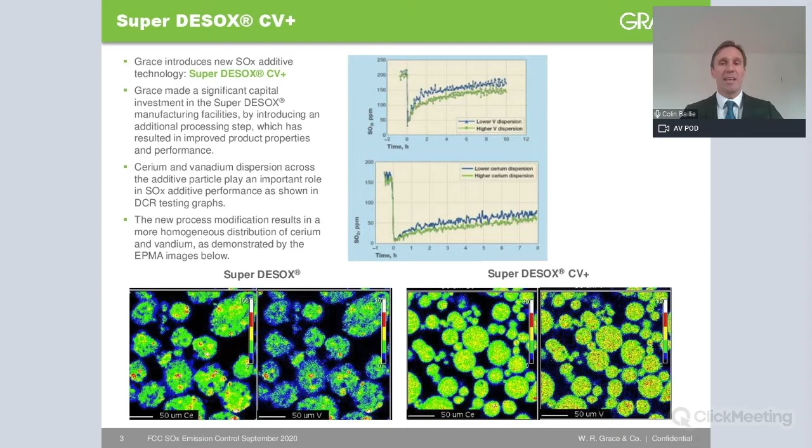Slide 5 shows the XRD pattern for Super DESOX in red versus the improved CV+ in blue. The magnesium alumina spinel peak is at about 45 degrees, with free magnesium oxide appearing as a shoulder on the left, and there is a second peak associated with magnesium oxide at around 60 degrees.

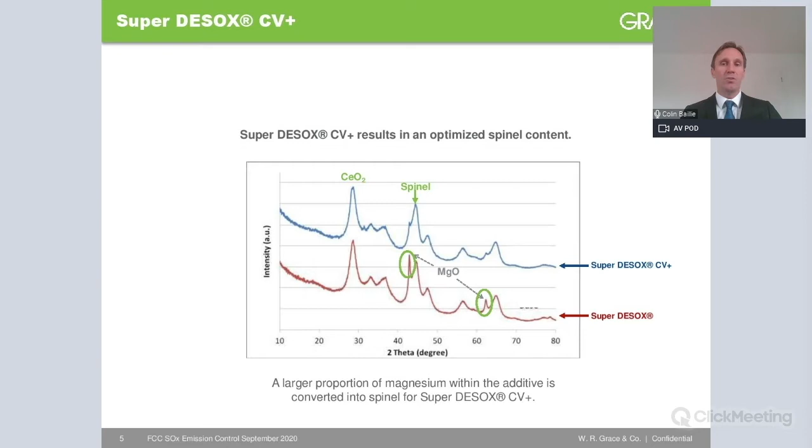In addition to these trials shown in the table, we also have a couple of additional Super DESOX CV+ trials lined up in 2020, which are expected to start in the fourth quarter. And as well, the additional processing step that we introduced to the manufacturing facilities has allowed us to pursue some additional new technology leads. And through ongoing R&D projects, we are hopeful that we can launch the next technology advancement in 2021.

So moving into the second half of the presentation, I will give a brief discussion of some of the recent case studies that I have been referring to. So one of the initial trials that took place was at Refinery A in North America, and this began in March 2019. This is a case study that the refinery gave us permission to publish, which we did in the fourth quarter edition of Petroleum Technology Quarterly. It's an FCC unit that operates in full burn, and the refinery initially switched from the non-Grace SOx additive to the CV+ at a 1-to-1 replacement rate.

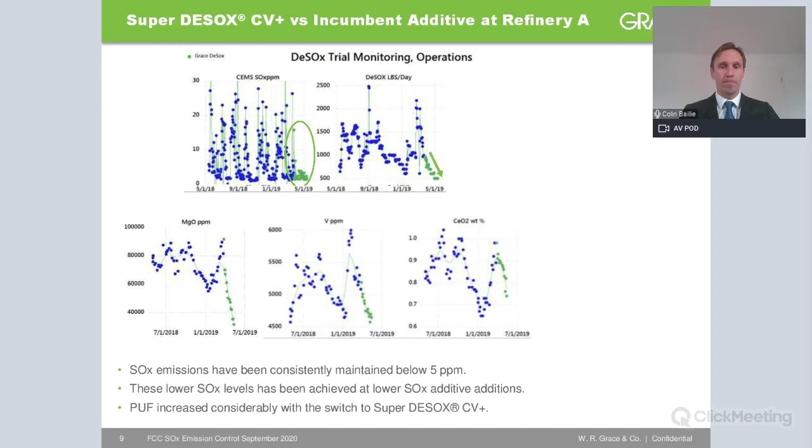But really the conclusion here is that whichever way you look at it, at comparable conditions, the Super DESOX CV Plus is delivering lower SOx emissions than the previous additive technology. The refinery subsequently decided to use CV Plus on an ongoing basis, and they continue to see excellent results.

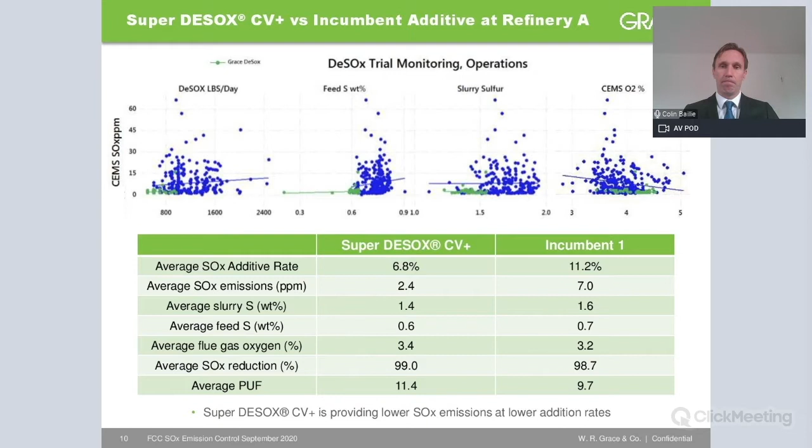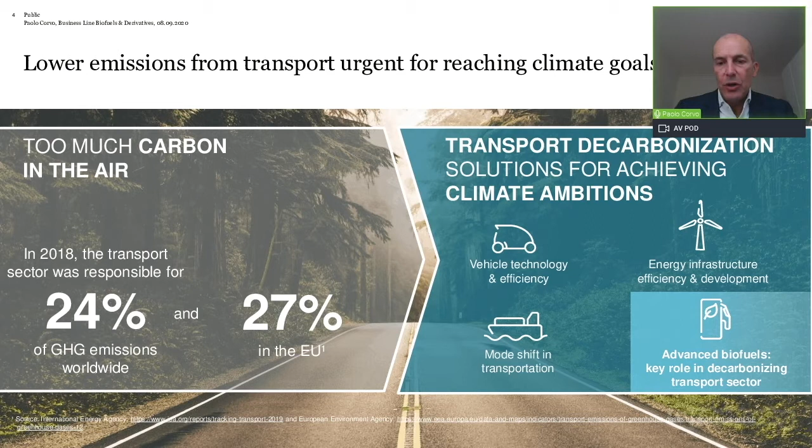You can see here on the right that solutions that are enabling to achieve and decarbonize climate are certainly ambitious targets to be achieved. We believe that in addition to vehicle technology and efficiency, energy infrastructure efficiency and development, and also different modes, and so shifting transportation modes, advanced biofuels, and more specifically lignocellulosic ethanol, is certainly the solution that plays the most important role in decarbonizing the transportation sector.

India has set a national biofuel policy back in 2018 with specific requirements to build up 12 second-generation ethanol plants by 2022, and public tenders are ongoing as we speak. Then we have the Americas, North America, and more specifically, certainly with California as one of the key areas or as a benchmark when it comes to acceptability and interest in advanced biofuels.

South America with the renewed RenovaBio legislation that came into force in 2020, which is requiring to double the volumes of ethanol in the country. And then finally, we have Europe, which is by far one of the benchmarks when it comes to renewable energy requirements and advanced biofuels. How does it look when it comes to Europe?

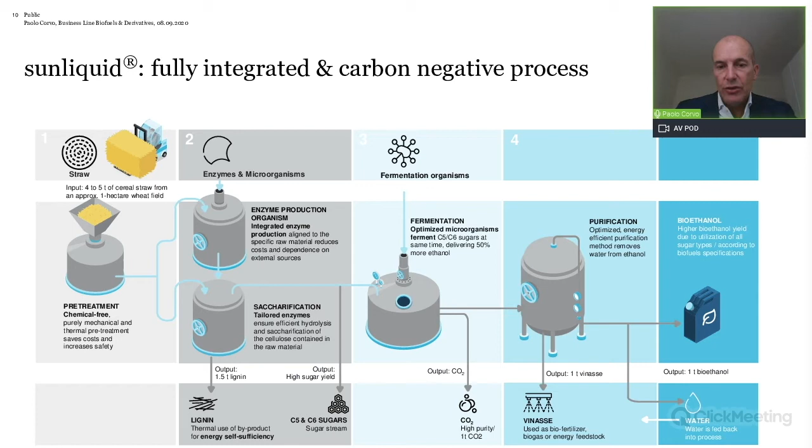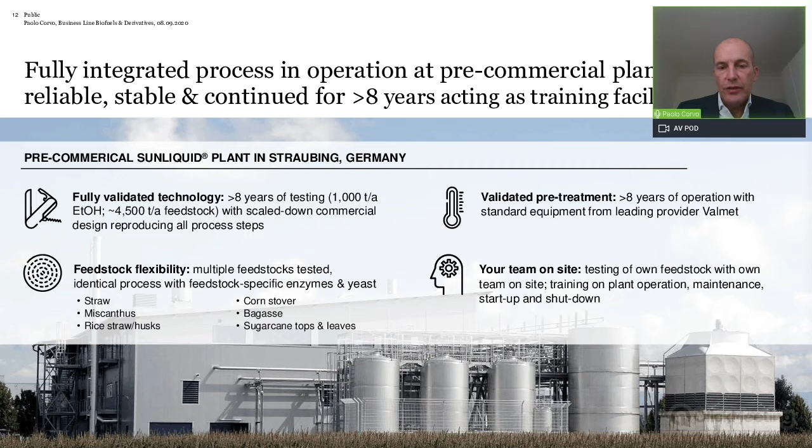So we validated the process, we validated the results on the conversion of the feedstocks to sugar to ethanol. And this really has been serving as a testing site and also as a training site for our customers. So the customers bring their own feedstock here. We test it. We provide back the results and also the samples. And this is the base for us to then start our license and service contract based on the results obtained in the facility.

The natural next step was to go from this pre-commercial site to a commercial site. So this is what Clariant has decided to do, to invest its own money in a plant that we are constructing in Romania. This will be a 50,000 tons ethanol facility using locally sourced feedstock. This will create a substantial number of jobs, will be our first of its kind plant, and will be used as a training facility also for our customers.

The pathway to where we're at now: the decision and approval was back in 2017. We broke ground in 2018. We started harvesting the amount of feedstock necessary on the field. This is an area, Podari, Romania, where the straw is left on the field, so we had to construct the whole value chain. This is a good learning activity for us to be deployed and brought to the market to others, to our customers. As we speak, we are into construction, and we are expecting to complete the construction by 2021 and from there onwards start the production.

I told you that we had to create and complete the value chain, and that's what we're doing with a dedicated team. And this asset that is internal to Clariant is brought back on the market so we can supply our prospects with knowledge and support them in the creation of the value chain. Now I would want to show you a latest drone video that was taken some days ago in Romania so that you can appreciate the construction progress at the site.

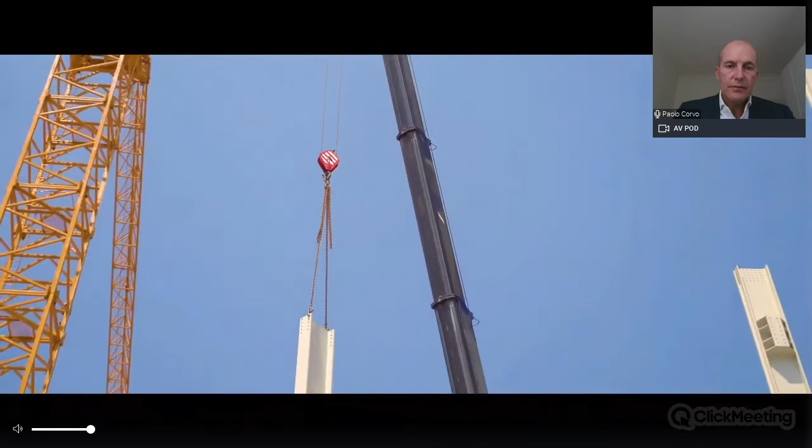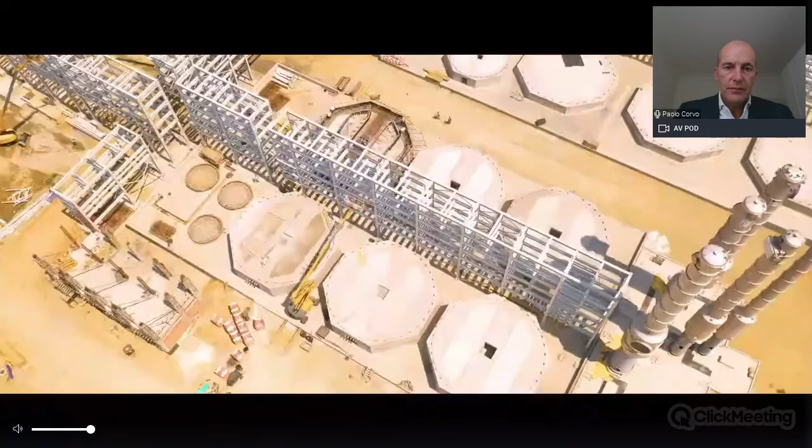Good. So we're quite proud to be able to show this drone video, because despite the terrible times of Corona throughout these months, we were able to continue the construction of the site, of course, with all the required safety measures, both for our employees, but also for the construction site workers.

So our responsibility is not only to construct this site and showcase this facility as a training facility for our customers, but it's also to bring the technology to the market by licensing, so by selling licenses. And this is what we've done. We already sold these 3 licenses in Europe to different players. The first one was sold to Enviral, a first-generation ethanol and biodiesel player. It's a 50,000 tons ethanol facility in Slovakia.

The second one in Poland to a mineral oil player. It's a 25,000 tons per annum site with straw, locally sourced feedstock. And the last one that was sold in Europe is to Etabio, a Bulgarian company, which is one of the major players in the Bulgarian agricultural sector. So I think it is important to state that sunliquid technology has been sold to different players throughout the whole value chain, from feedstock to first-generation ethanol players to mineral oil players.

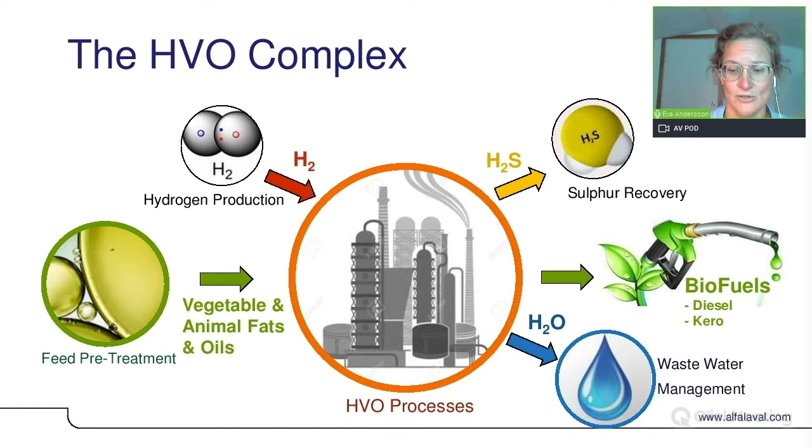If we start with the feed pretreatment, the feedstock flexibility, that is going to be the key parameter to make your plant as profitable as possible. Selecting the right feedstock, depending on what product you want to produce, depending on what kind of availability there is in the market, and depending on what kind of plant you are going to run it in, is going to be key. There are different kinds of feedstocks. And of course, seed oil is one of the most commonly used feedstocks.

And among the seed oils, crude palm oil is by far the most popular feedstock for HVO production. One reason is because it has a very low phosphate content. So it has little impurities and requires only very little pretreatment. It also has a high availability in the market, and it has a high energy intensity. So you will get a high yield of products if you are feeding your HVO unit with crude palm oil. But of course, for obvious reasons, there are other concerns with crude palm oil as a feedstock. There are environmental concerns, and there are also policies that might even block you from using crude palm oil as a feedstock to your plant.

It means you might start to look at other kinds of seed oils, such as rapeseed, corn, sunflower seed, which are all available in the market, but they have a higher phosphate content. And with a higher phosphate content, it means you're going to need more pretreatment steps in order to remove impurities that could otherwise poison your catalyst or create fouling in your process equipment. There is also, with other seed oils, the food versus fuel debate. So the seed oils that are also competing as food might become less and less available, and they won't be available to be used for fuel production.

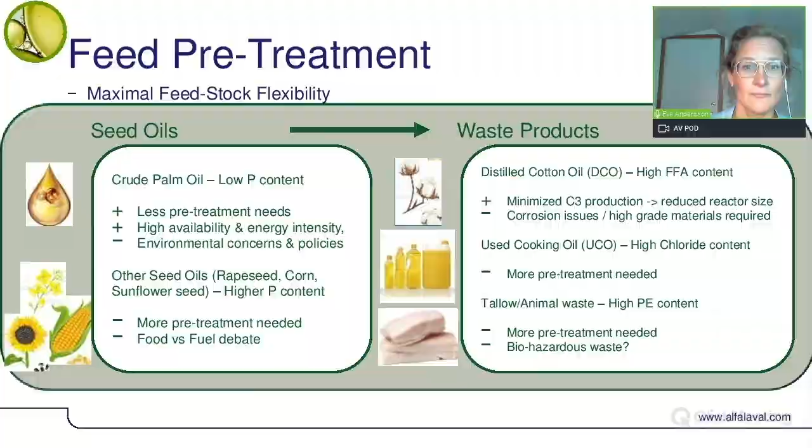So if we are looking at the different feed pretreatment steps required, as we said, with crude palm oil with very low phosphate content, you actually only need one pretreatment step, and that's an adsorption, where clay is being used to precipitate and take care of the phosphate compounds.

You will get a byproduct, which is spent clay, which contains residual oils, soaps, and metals. But after that, you have a pre-treated feedstock ready to go to your HVO.

For all other seed oils where you have a higher phosphate content, you also need to have a degumming section. Degumming can be of various kinds. It can be just hydration, washing with water, or it can be chemical, which means you are treating it with a weak acid, or it can be enzymatic degumming, where you need an enzyme to remove the phosphate compounds from the feedstock. The byproduct from degumming is wastewater containing all these phosphorus compounds that you have removed. And that wastewater needs, of course, to be treated.

If we jump down to the lower section, you have your used cooking oil. The used cooking oil contains a lot of chlorides, which need to be removed before you send it to the degumming section. That's again a water washing, which then creates a wastewater containing chlorides. Then you can continue with the degumming.

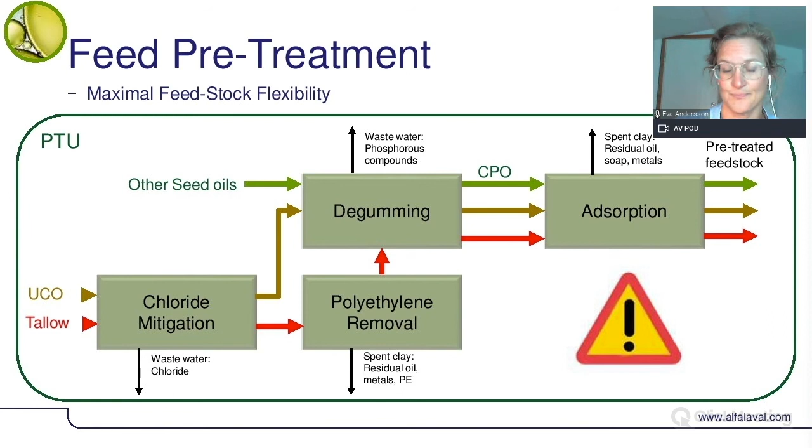All of these processes are operating at quite low pressures and temperatures if you compare to normal refinery processes. So in that sense, you could say that they are more safe, there is less risk operating them. But there are, of course, other safety and health issues that you need to be aware of. One of the most important is the self-ignition of a lot of the feedstock being used for the HVO pre-treatment. So you need to be very careful with oil spills to make sure that you don't get a dangerous situation in your pre-treatment unit. And as I mentioned before, if tallow is being used as feedstock, you need to be careful if it's classified as biohazardous waste. That was all about the feed pre-treatment.

Next, I'm going to talk about your HVO processes, the stripper and fractionation section. The hydrotreater and the reactor section itself is a little bit different compared to a normal refinery hydrotreater. It's a very exothermic reaction because of a lot of free oxygen available in the feedstock. So a lot of energy is going to be produced in the reactor section, and you are going to need a lot of different means to remove this energy from the process.

So if we start looking at this fractionation section, one interesting opportunity is, of course, to optimize the pressure at which you run the fractionator. If you can reduce the pressure in the fractionator, it means less energy input required in the reboiler or in the fired heater of the fractionator. But it also means a better split between close boiling range products, such as the bio-naphtha and the biojet. So you can increase the production of biojet over naphtha.

So how are you going to reduce the pressure in the fractionator? One obvious way is if you can minimize the pressure drop in the overhead condenser. By using heat exchangers that can operate with lower pressure drop, you can reduce the pressure in your fractionation section. Another way is to use heat exchangers that can cool and condense the overhead vapor to a lower temperature, closer to the supply temperature of the cooling media.

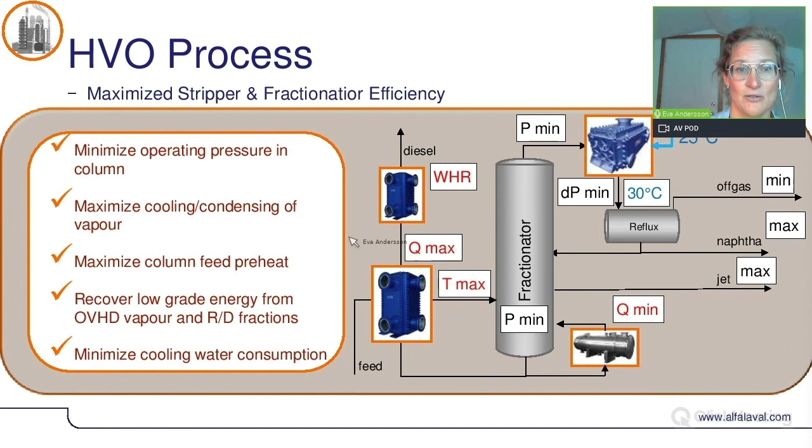And you will see in a later section how refineries are optimizing and maximizing waste heat recovery from the hot rundown streams to use this energy for interesting purposes in other parts of the plant. But if we start looking into a feed effluent interchanger, this is an isomerization stripper, which is optimized with maximum heat recovery in the feed bottom interchanger, which is a welded type plate heat exchanger.

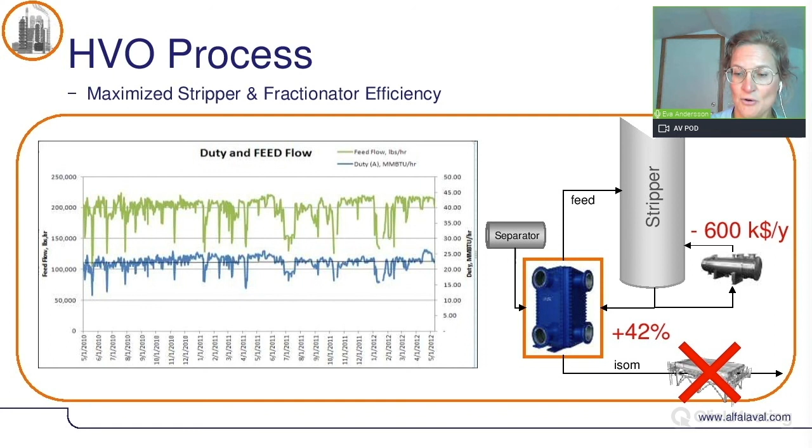So finally, we will talk about your wastewater management. As I already mentioned, there are 2 processes in the feed pretreatment plant that are going to produce quite a lot of wastewater, and wastewater maybe with a different kind of character compared to normal refinery wastewater. In the degumming section, there will be around 5 to 10% of water to the oil flow, and that will then be a wastewater with a phosphorus content.

For the chloride mitigation section, you also have around 5 to 10% to the oil flow, but normally there is less oil flow that needs to be treated in the chloride mitigation section. So it's normally less wastewater, and sometimes some of that wastewater could actually be used from the degumming section. But there is still going to be a high amount of wastewater produced, and of course as well from the hydrotreater section, the deoxygenation reactor, there is a lot of wastewater being produced.

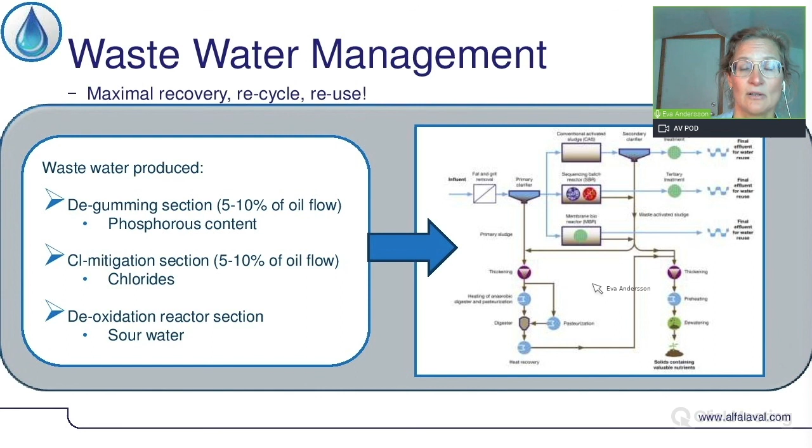You need to see if your existing wastewater treatment plant can handle this amount and these kinds of impurities, or maybe you need to do investments in your existing wastewater treatment plant to debottleneck it and make it fit to handle more capacity. Or you can do what a refinery in Europe is planning to do. This is a new HVO complex with a capacity of 2,800 cubic meters per day, producing green diesel and jet fuel. They are going to install a zero liquid discharge evaporation system.

So they have around 34 tons per hour of wastewater, which contains 0.7 up to 3% of fatty matter. That's being sent to an evaporation plant where it is concentrated, and the waste coming out is less than 0.8 ton per hour, with 30% fatty matter, so more or less a zero liquid discharge system. In addition to the advantage of sending a much lower content of waste to your wastewater treatment plant, this plant will also produce condensate, which can be recycled back to your pre-treatment plant to be used in your degumming and your chloride mitigation section. This plant will produce almost 42 tons per hour of condensate.

To run this plant, the refinery needs fresh steam. They need around 8 tons per hour of 4 bar fresh steam to run this evaporation plant. However, what this refinery is planning to do is waste heat recovery in the fractionation section. So by cooling down the hot products before going to tank, they will generate 10 tons per hour of 4.2 bar gauge steam from the hot rundown streams. So that steam can be used to run this zero liquid discharge plant to minimize the waste going to the wastewater treatment plant.

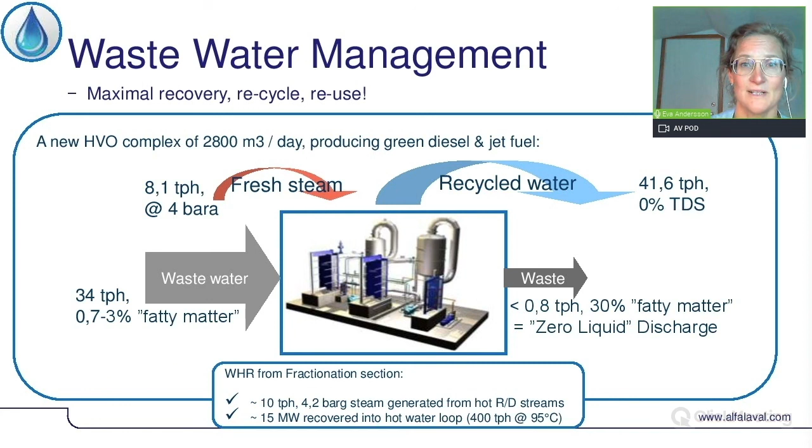So these three parts in your plant are very closely interconnected, and by optimizing how each one of them is performing and how they are operating together, you can maximize your feedstock flexibility and get your longest catalyst life cycle. You maximize your product yield and your energy efficiency. You minimize capex that goes into this new HVO complex, and you minimize your waste and your environmental footprint.